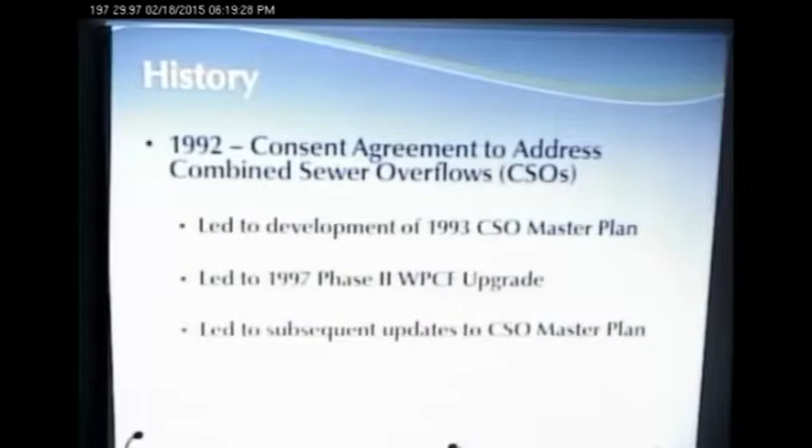It also led to many subsequent updates to that plan, one of which was just recently submitted to Maine DEP in January of this year. That's really just updating the work that's been done, what progress has been made in eliminating these extraneous flows and the CSOs that happen during wet weather events. This 1992 consent agreement has really driven a lot of the wastewater related work over the past 2 decades here in the city.

Here's your wastewater treatment facility. Some people may be familiar with it. It's by the North End Boat Launch off Bowery Street. Very nice, very well-maintained facility by the city staff, Chris and his staff.

As I mentioned, there was a 1993 upgrade that contemplated the dewatering system, the system that dewaters the solids. There was also a 1997 upgrade as well. That was the facility that was put in to be able to provide treatment, or primary treatment, for some of this extraneous water that makes it to the plant.

As far as expenditures at the wastewater treatment facility, here's some figures for the 1993 and the 97 upgrades. The 1997 one, as you can see, was about a $5 million upgrade, and that results in a $315,000 annual payment that the city makes for 20 years. I'll talk about that retirement in a few slides.

Over the past 5 years, there's been approximately $100,000 a year spent, and I believe this is accurate — correct me if I'm wrong, Chris or Peter — that for this current fiscal year, there's only about $87,000 allocated for capital improvements at the wastewater treatment facility. That's not to be confused with the operating and maintenance budget, which is obviously much larger. This is for capital improvements, replacement of equipment and whatnot.

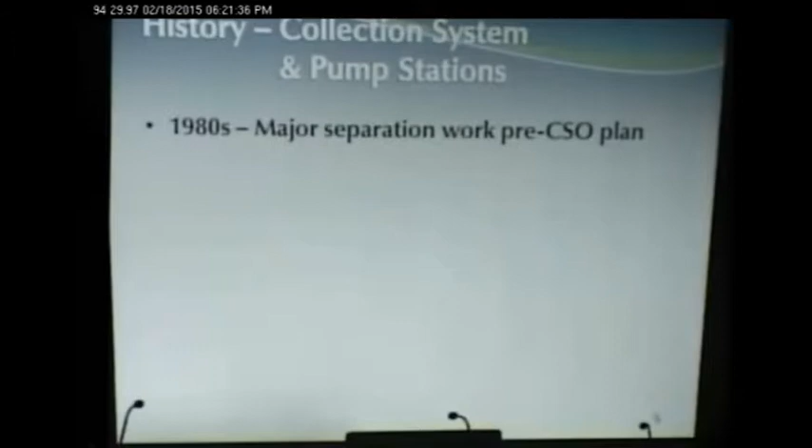In the 90s, there were a number of large separation projects in Lambert Park, on Commercial Street and Center Street, and also some work that was done as part of the street improvements program. I think that was some sump pump removals and roof drain removal type programs to get those out of the sanitary system.

In the 2000s, there were a number of CSO master plan updates and reassessment of where the city stood, and also, implementing any CSO master plan requires doing a number of things to try to minimize what's getting into the catch basins, like removing gravel off the streets, taking sand off the streets, trying to catch material coming out there, and maintaining your infrastructure to make sure it stays in the pipe. So there's a number of things that need to be done — those are just best management practices that are done by anyone with a CSO in their town or community.

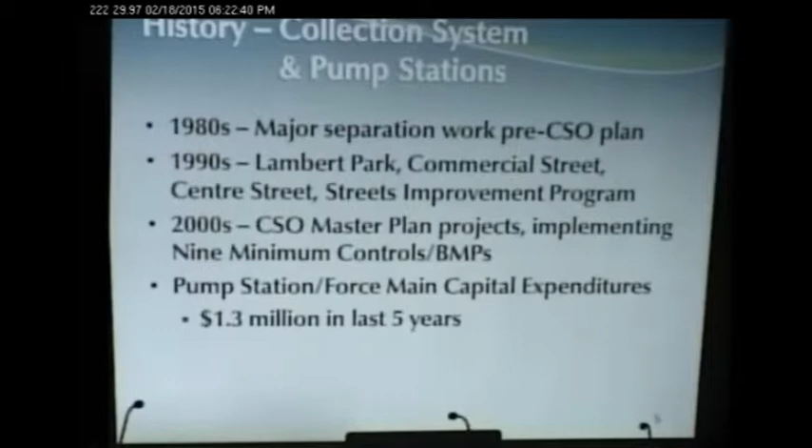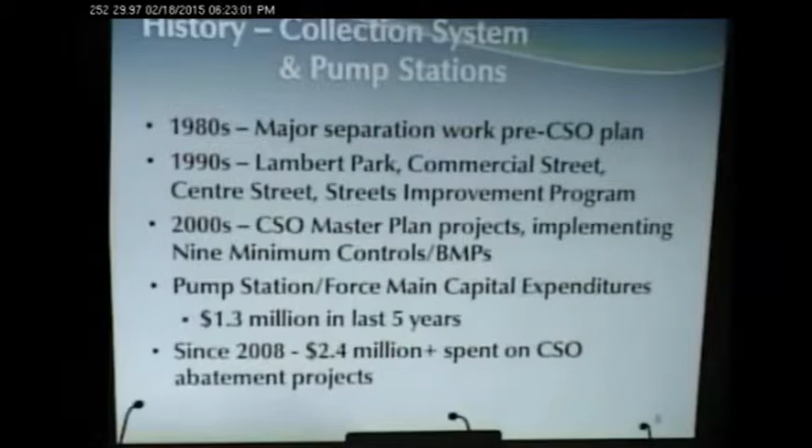Over the past 5 years, a good amount of money has been spent. This is particularly on the Harward Street pump station — $1.3 million spent there over the past 5 years. So there's been some money spent. Overall, when you look at all of the work on the collection system — pump stations, pipeline, and CSO-related projects — the city has spent nearly $2.5 million on that work over the past 6 to 7 years or so.

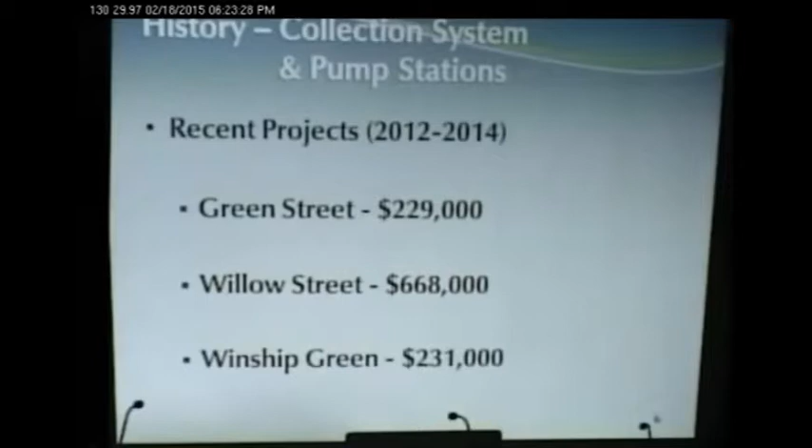Here's just a listing of some of the projects that you have completed over the past 2 or 3 years: the Green Street project, the Willow Street project, and the Winship Green projects. These are projects we were not specifically involved with, so if you have questions, hopefully Peter can probably answer them better than I can. But just to give you a summary of the type of expenditures you've had within your collection system to help minimize these CSOs.

Looking to the present and future, despite 22 years of work totaling over $10 million spent on your wastewater collection system and treatment facility, there are still areas overwhelmed during wet weather. You still have active CSOs, and as we discussed with Willow Street, there are areas where water gets to the ground surface out of the sanitary system. Every day the system gets older, you need to continually maintain any asset you have, or it will just continue to get worse over time.

The city's been doing a good job, but there are still some areas that need attention. There are 4 CSOs, and the 5th one Peter mentioned is actually the licensed one at the wastewater treatment facility, so that makes 5 that still remain active.

Beyond the collection system, with your pump stations and your wastewater plant that treats 2 million gallons every day, there's equipment that needs to be maintained. Just like a road that wears out, the same goes for a pump, a building, a roof, or anything at these facilities. As Peter mentioned, I'd say the wastewater system here, if it's not your number one asset in value, it's darn close to it, just because of the magnitude of the infrastructure there.

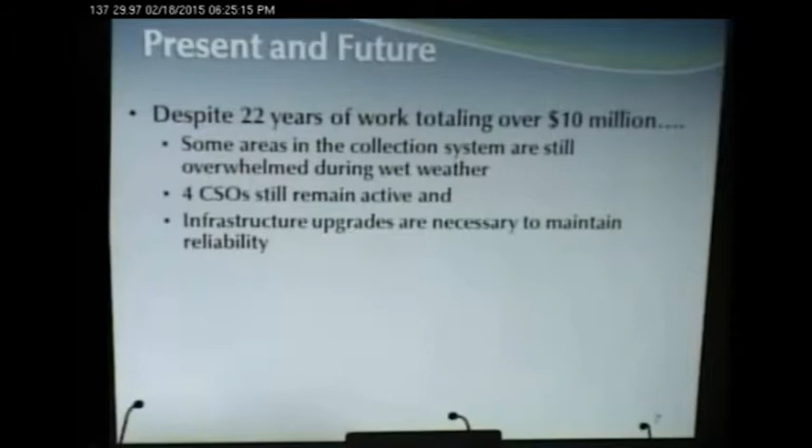So while there's still a lot of work to be done, and a lot has already been done, the good news is that the debt from the 1997 upgrade is being retired in 2017, which is a $315,000 annual payment. At 2% interest, that's just over a $5 million project, so there's an opportunity to do about $5 million worth of work once that debt is retired, without impacting your existing ratepayers.

That assessment looked at all the assets there: how are they doing, do they have enough capacity, do they need replacement, does the plant need additional capacity, what permitting issues are on the horizon that might impact the community, and what code-related issues exist with buildings built back in the 90s that may not be compliant with existing codes. It was a soup-to-nuts evaluation of the wastewater treatment facility as well as the 5 pump stations, the 4 in the south end and the Aegis Drive one across from the tennis courts.

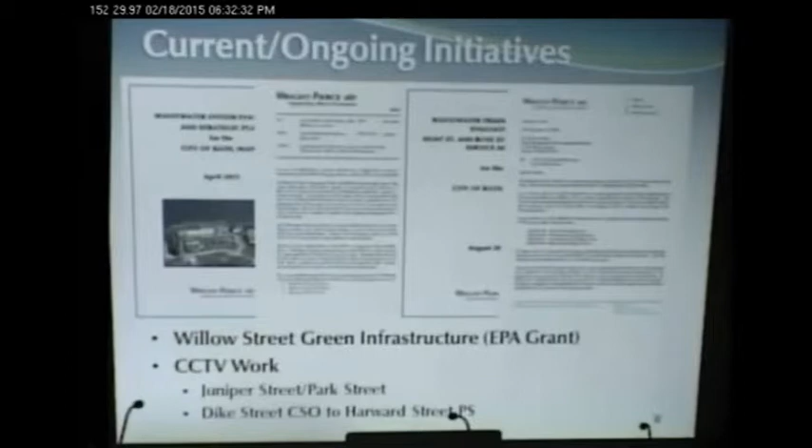So looking forward, that was kind of an update on what Wright-Pierce has done since 2012 for the city.

Through the completion of the evaluation of the wastewater treatment facility and the 5 pump stations that we looked at, as well as the study looking at the south end, as well as past work that's been done by the city, we've come up with a listing of projects that we envision happening over the next several years. A number of those are in that CSO master plan that has already been submitted to Maine DEP.

So over the next few years, this year and next year, a number of critical path CSO abatement projects. The big focus over the next couple of years is going to be projects within the collection system, one of them being the Willow Street area, and the Juniper and Park area, where there's also been some overflow issues.

And starting some work down in the south end as a result of the study we did in the Hunt and Rose Street drainage areas. One of the projects down there is, while no one likes to hear that we're going to reopen an old CSO that was closed many years ago, we've done it in a couple of communities, and in this case we're recommending it down in that area. The reason is it's better to have wastewater go into the river than to go to a street where it can have human contact.

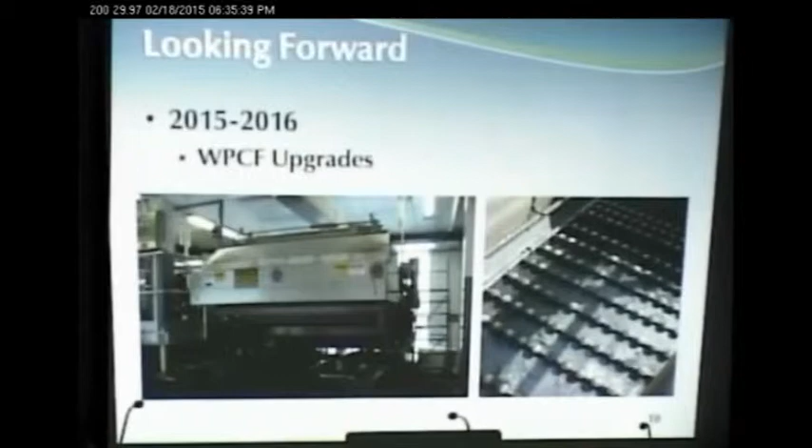Moving ahead to the 2017 to 2019 window, there's 9 more CSO projects listed in the CSO master plan update. Some of these projects are not the largest in the world, they can be very small projects, but suffice to say there's I think 24 total projects that were in that letter that went to Maine DEP.

So we're trying to break them up over time, not to spread out the cost, but also do the highest priority ones first. And also, as recommended, 3 of the pump stations we recommended upgrades for: the Riverview pump station, the Bridge Street pump station, and the Aegis pump station.

Looking even further forward, the treatment plant in 2020 is going to be 23 to 28 years old because the equipment was upgraded in '93 and '97. There's a lot of equipment there, just like anything, that's going to wear out and need replacement.

So within our study, we had recommended a more comprehensive upgrade to the plant to touch every area, a lot of the mechanical equipment, some stuff that's just worn out from dealing with grit and solids, wear and tear. If you go to the treatment plant, you'll see the kind of environment the equipment operates in. It's a very tough duty, really an industrial type facility.

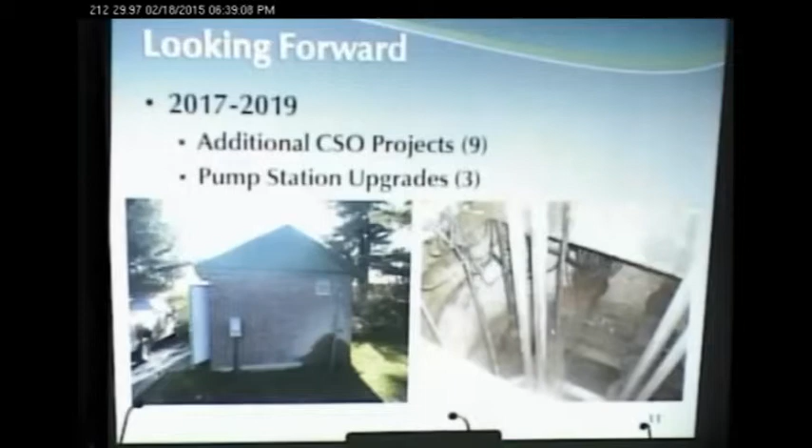So we talked about the major pump station upgrades, fairly substantive pump station upgrades. They're the brick buildings that you drive by when you go down Washington Street, Rose and Hunt Street. Those are a couple of the larger pump stations the city actually has.

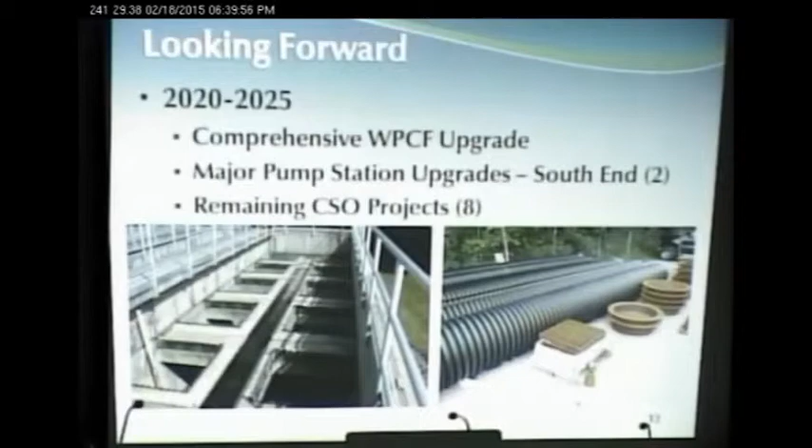And the remaining 8 CSO projects, there's 8 more projects. I think it's kind of too early at this point to say we know for certain we're going to do those 8 projects, because you're going to do 16 or 17 more before that. That may go a long way towards solving a lot of your problems. While you still may have to do projects in 2020, it may not be those 8 projects, it may be something else, because we keep reassessing every 5 years. So probably around 2020, we'd be looking at doing another update and saying, are these really the right projects to do, or should we be investing somewhere else?

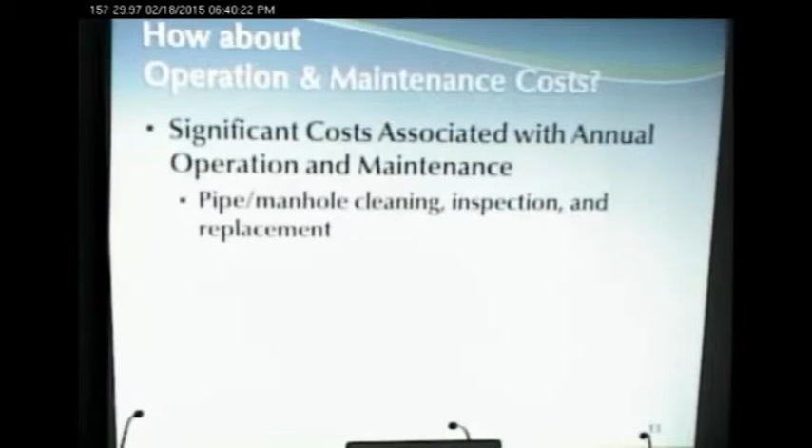We've talked a lot about capital, and a little bit about the CCTV work, closed-circuit television work within the system. It's not only all about capital investments. There's obviously your operating maintenance budget associated with the treatment plant, but there's a lot of costs every year dealing with pipeline cleaning, inspection and replacement. Going out and taking a look at, did we do a good job on this project in this collection system? How much water did we get out in a comparable storm?

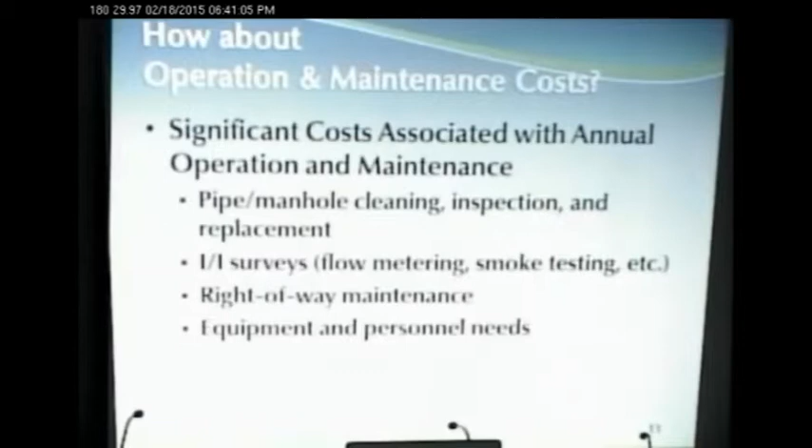The smoke testing that I mentioned, maintaining right-of-ways. While it's nice to have pipes that always run down streets, they don't all run down streets, some of them are cross-country, so you have to maintain those. You don't want trees and roots growing down into your pipes. And certainly there's needs for equipment and personnel to do this work. So while that's not really part of a capital request, it's just something you should be aware of, that there are needs, like with anything, sweeping the street, cleaning the sewer line. There's things that need to be done from time to time to maintain what's a very important piece of infrastructure for the city.

As part of the work we've done and work done previously, we put together some numbers based on study-level data to estimate costs the city could be looking at for upgrades to the treatment plant, the pump stations, as well as work for CSOs.

For the next couple of years, we talked about the dewatering upgrade and the aeration upgrade at the treatment plant. Those are fairly substantive upgrades, nearly $5 million, just over $5 million. Not really a lot of work at the pump stations over the next couple of years. There may be a few things in your CIP, a pump that broke down that needed to be replaced, but fairly limited over the next couple of years, and a little over $1 million in those collection system projects we talked about.

Moving ahead to the 2017 to 2019 window, little or no work at the treatment plant, taking a little break there, focusing more on the pump stations and the collection system. Not a huge amount in those years compared to the previous two years or the 2020 to 25 window.

Looking at that 2020 to 2025 window, those numbers are probably the ones we know the least about at this point because they're that far down the road. A lot of that money in the pump station, the $2.2 to $7 million, really has to do with the success of some of the collection system work we do in the next few years. We may find that $7 million isn't necessary; it may be closer to the low end. Suffice to say, we've carried a range in there.

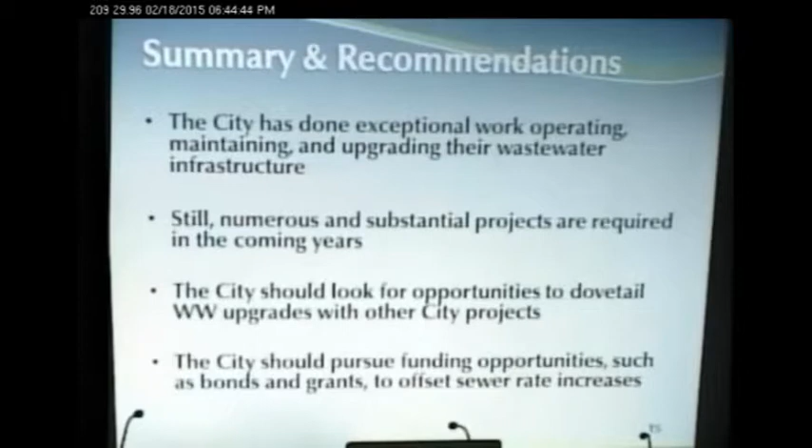And obviously, my next slide is some funding opportunities. There's a lot of opportunities, some through Maine DEP with the Clean Water SRF program, and even opportunities to get some principal forgiveness on the principal that you have.

Best I can tell, with the city's population being under 10,000, you should be able to go after rural development loan grant packages, and those can be fairly lucrative as far as the grant component, depending on how you score in the community on a number of various factors. We talked earlier about CDBG funding, which you're going to be looking to use for the North Street project. There's other opportunities too, some state and tribal assistance grants, STAG grants.

Efficiency Maine, you're certainly familiar with that, and that probably would apply mostly to the treatment plant or any pump station upgrades, you may get opportunity there. There's a lot of money. Efficiency Maine has a lot of money, and it's your money, all of our money that we put into our rates for electric that they've put back into the program. So there's a lot of opportunities there.

And I threw up the EPA green infrastructure one, you're familiar with that from the Willow Street work. So while there are some large numbers here, there's also some assistance available to help you do this more affordably. Also, as you recall, you have a $315,000 annual payment in 2017 that's being retired. That equates to about a $5 million project, a little better than a $5 million loan, without any rate increase or impacts.

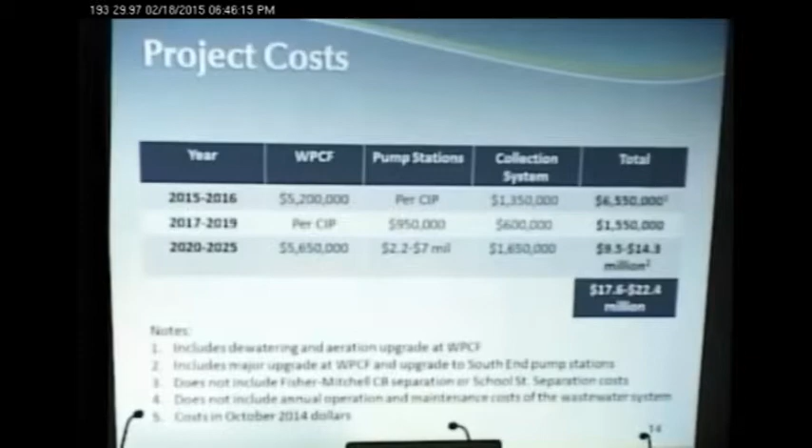That's all I had. I'm happy to answer any and all questions that you have. I know we covered a lot of material.

Hey Chris, quick one for you. One of your slides is the solids press, which we've seen in action. Pretty amazing piece of equipment there. You're saying that needs to be replaced and gone to something that's going to make it drier? Yeah.

What do we do with that material when our landfill is full and capped and no longer in operation? Is that something that piece of equipment can be replaced with something that makes it more affordable for us to truck it over the road to somewhere else, or to use it in a different manner in composting or something? Over the past 10 years, there's been a huge change in the industry of dewatering solids at wastewater treatment facilities.

This technology that you had was very common at the time it was put in. There are a number of newer technologies out there that can wring a lot more water out of those solids. And if you're going to be trucking it long distance or somewhere other than the city of Bath, which is likely, the more water you can get out of it, the less you're going to pay at that facility to take it, because you're going to have less tons and you're also going to be making less trips. So there's an opportunity there to get a better return on investment, because you're actually taking more water out.